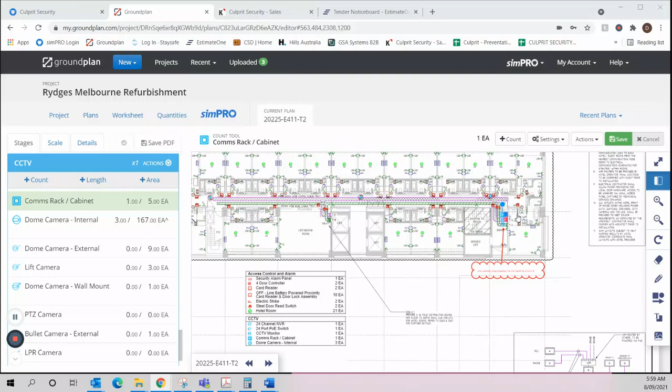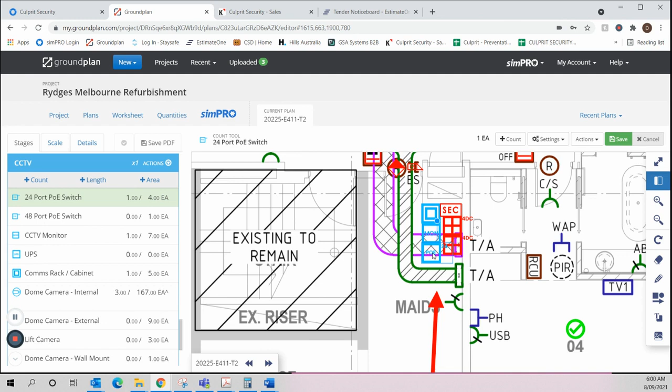All right. So comms rack, monitor, PoE switch, recorder. In a typical building, we would only have one recorder. So all of the CCTV would run back to one recorder in the main comms room. PoE switches are fine to manage everything across the levels. That's no issues at all.

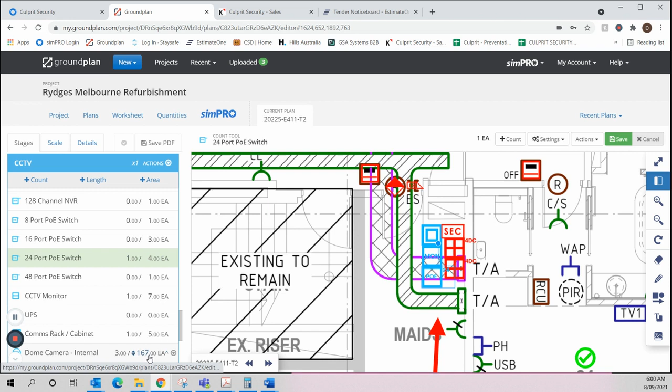But yeah, NVR. So NVRs, there will only be one NVR, and it will be down in the main comms room, and it will capture all of the cameras. So in this case, there might be two because there's so many cameras. We might use a 128 or some combinations of recorders, but one NVR.

Also, the racks we're not providing, and we wouldn't be putting monitors at each position. So from a CCTV perspective, all we're doing on each individual floor is capturing the PoE requirement. Same with security. We wouldn't have another security panel. We would just have door controllers. So you only have one main hub or one main point where everything runs back to, and then everything outside of that is just built up as part of the network.

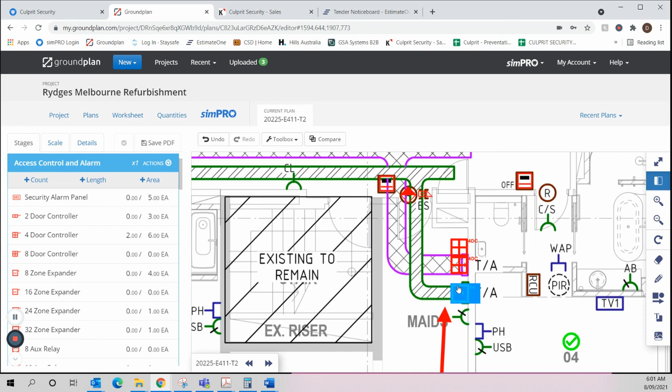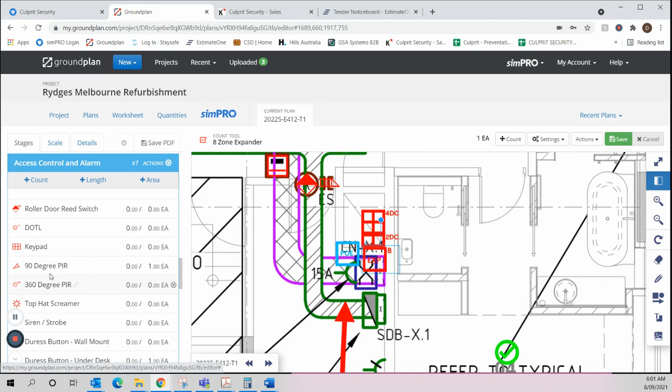So I'll scroll through and I'll explain on the drawings. So levels 15 to 19. So once again, don't need the security panel, don't need the monitor, need the PoE switch because that's going to pick up our cameras, and don't need a recorder. The expander, I believe, was for the PIRs, which we've now deleted as they're not part of our security side of things, so we remove that. So now we have our door controllers and our PoE switches.

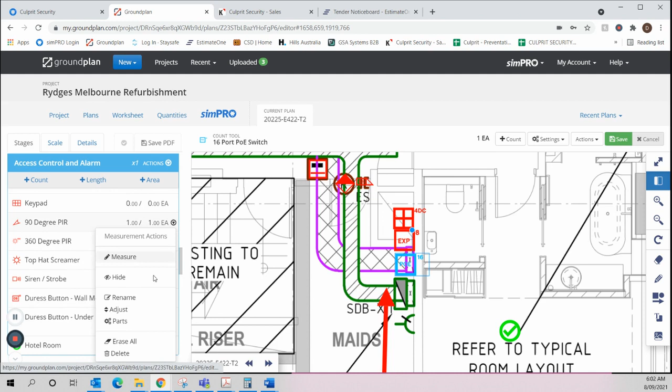So this is typical for every project. We only have one security panel, and unless we're specifically providing the racks, we don't have the racks. And monitors, there'll only be one monitor or a group of monitors down in the main comms room, and only the PoE switches are required. So zone expander as well. Just double check, not part of our stuff. We don't need that. So it's just the door controller and the PoE switches.

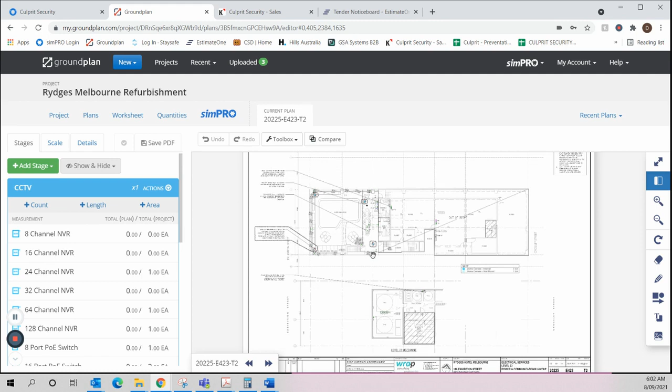Not in our scope, and I'm assuming these are running back down to another level. So we're capturing the CCTV on this level on another level in a PoE switch. Likely back to ground floor.

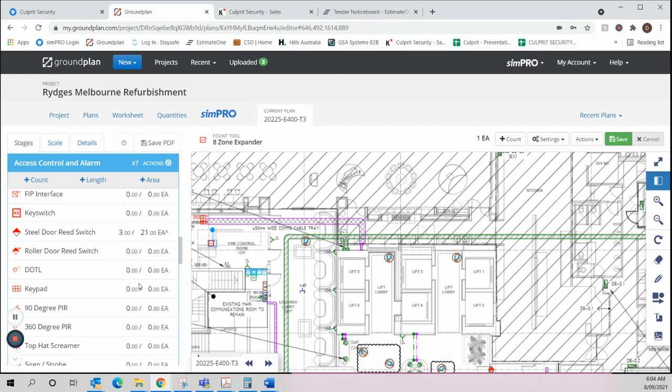So we come down and look at the zones that we've got down here. I believe it's only one. Okay, so we do have some reed switches. Just need to double check. Look like they're connected to doors. So if they're connected to doors, obviously part of the door controllers, so we won't have to put in the expander. And the fact there's only 3 on this floor, got rid of the 8-zone expander.

Then we would have an NVR to suit the camera quantities. So in this case, we would probably go with 128 and put it in the rack. And to capture the rest of the cameras, 67. 9 and 3 and 1 and 1, so 2, 5, 14, 1, 8, 1. So is it recorders?

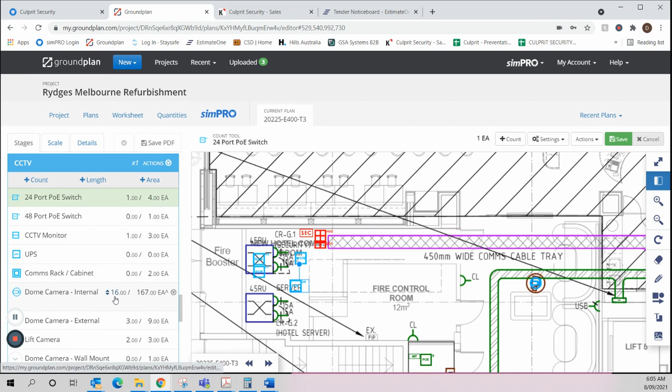I'll put a monitor here just based on the fact that I believe we need to put a workstation in with a monitor. The rack is not on us. PoE switches. I believe that we're capturing each camera level by itself. So on this level, we've got 16, 19, 20. So the 24 PoE is perfect. So that's how I would build this area.

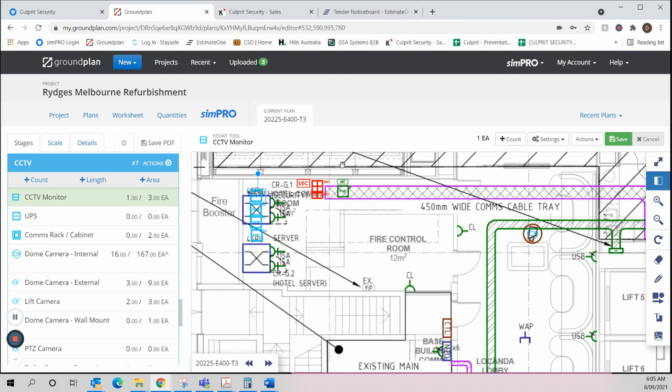Intercom control panel. So with the intercom, if we're using IP intercoms, then we don't actually need a control panel. We just need PoE switches. But I'll leave it there just for the time being, just to not confuse things. But that is typically how I would set up the main head ends of this one. So that's down in the main comms room. And then we just work our way up. You've got no head end on this floor, so that's fine.

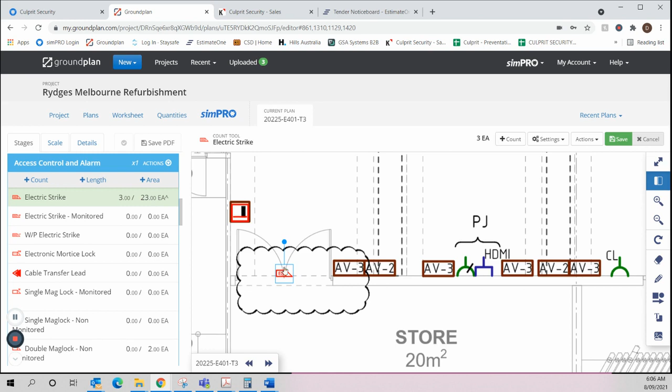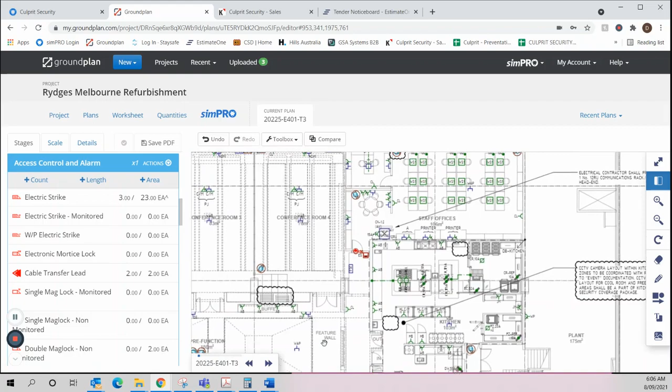Electric strike on double doors, make sure you put a transfer. Same thing over here. Everything else looks good.

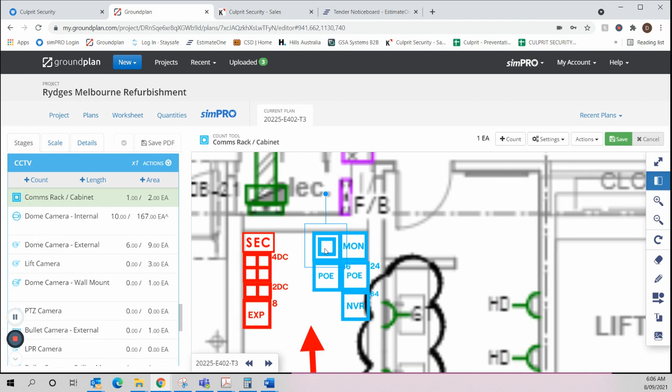Alright, door controller, expander, PoE switch, level 1, level 2. Okay, don't need comms rack. We don't need a monitor, don't need a recorder. So cameras are across these levels. If you've got that many cameras, 48 port. So if we don't need to put in multiple PoE switches, just put in the one.

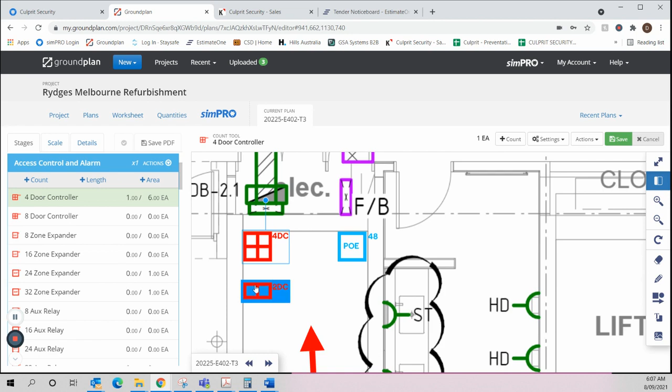Don't need a security controller. And the 8-zone expander, I believe, up here was for the PIRs, which don't exist anymore. So the expander can go as well. So if that doesn't make sense, let me know and I'll explain it to you. So that's this floor.

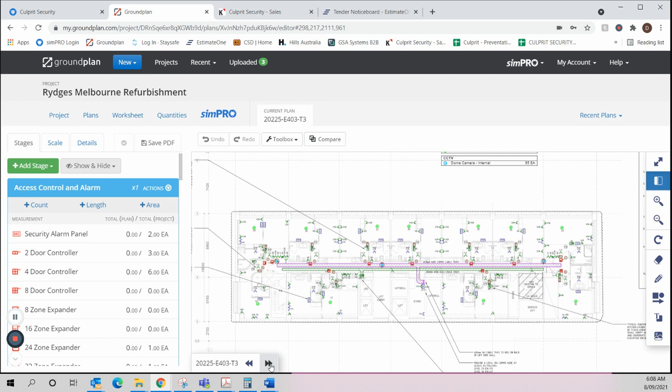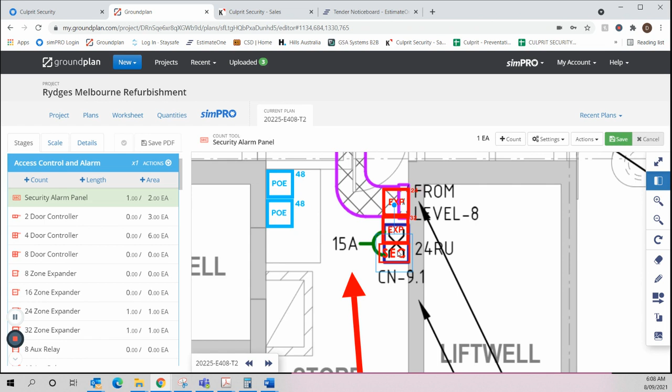Next floor, do you have head end? Nope. And I'm assuming this is across multiple floors. Yep, 3 to 7. That's fine. Okay, once again, no rack. PoE is fine. No monitor, no recorder. With two 48 ports, if that's what we need to go with. No additional security panel, no expander required.

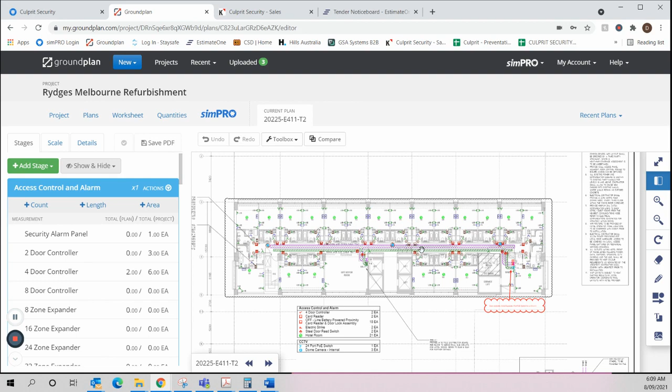24 expander. What are we controlling up here, guys? So no requirement for door controller or anything here. It's just the PoE switches. And this floor, it's fine. And this is the one I edited first.

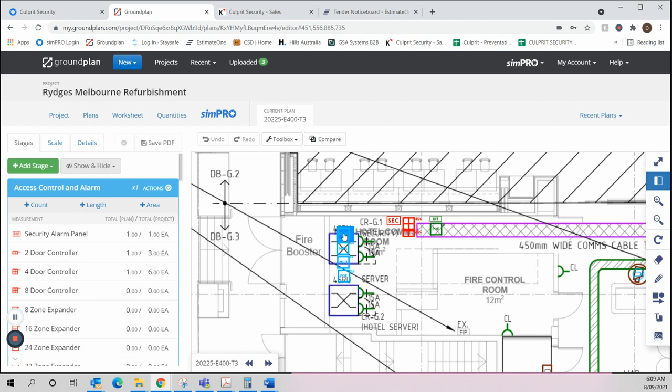So I hope that makes sense, the way that I've done that, but just to recap. So we only have one main comms room or head end location. We only then put in one main security panel, which is here. Obviously the door controller is local to it, one intercom panel, PoE switches relating to that, and then the recorders are down in this space too, and then PoE switches to support it, and a monitor if it's required. Hope that all makes sense.

If not, as always, just ask or reach out, and I'll happily assist.